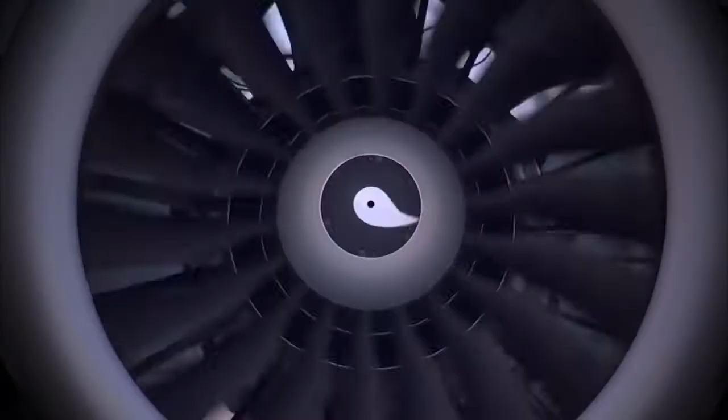The aircraft of today are quieter, more efficient and stronger than anyone could have imagined, even a few short years ago. Of course, future aircraft will continue this trend and become even more efficient and dependable, reaching unimaginable goals that today's aircraft could never reach.

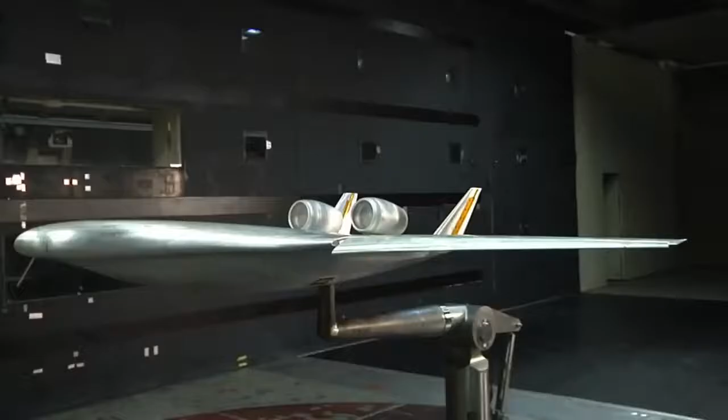But how will they reach these goals, and who is performing the important work to change the way we all fly? The common misconception is that most advances come strictly from major aircraft manufacturers. But the true story is much more complex. Unknown to most of the public is that one of the unsung leaders in aviation is NASA.

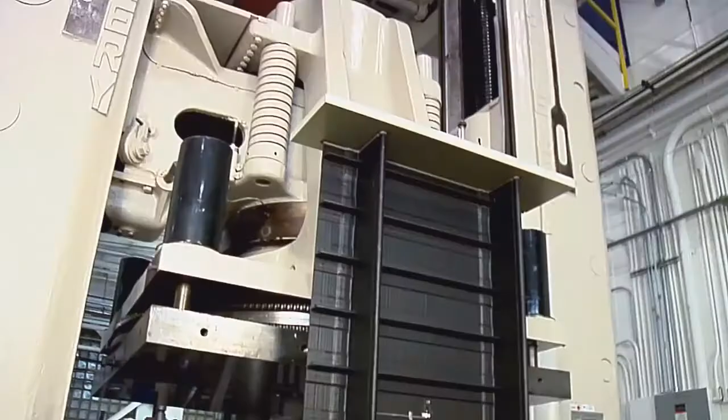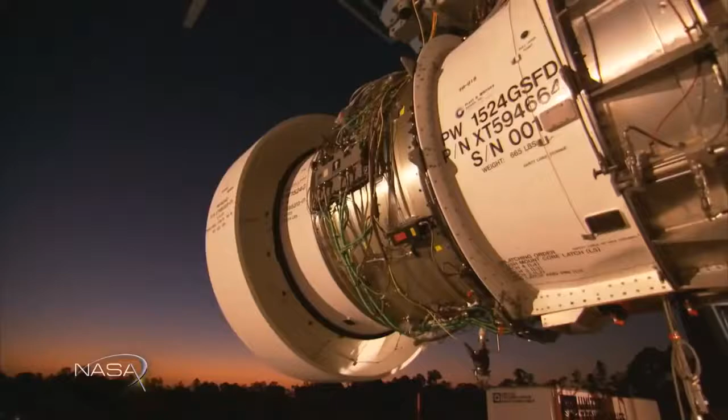NASA engineers work hand in hand with industry planners, developing and testing new designs to make aircraft safer, greener, and much more efficient. On this episode of NASA X, we will look at how this collaboration works, and we'll see how NASA and industry are paving the way for greener, safer aircraft for today and for aircraft of the future as well.

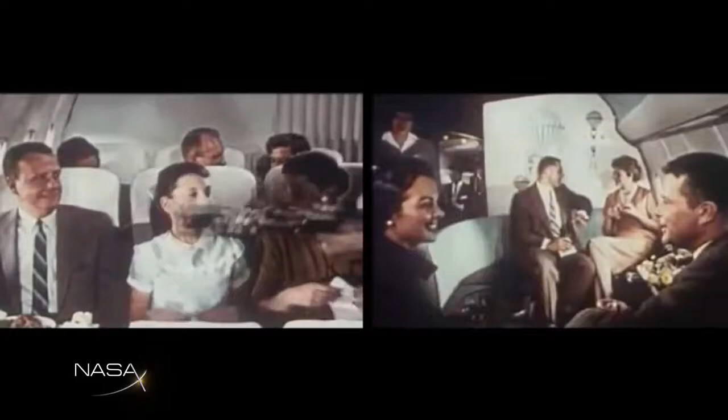This is a familiar sight for modern travellers. Large metal jets roaring down the runway and lifting into the air. In fact, this sight really hasn't changed that much in the last 50 years or so. Other than the way most people dressed for flights back then, the basic concept of air travel is pretty much the same.

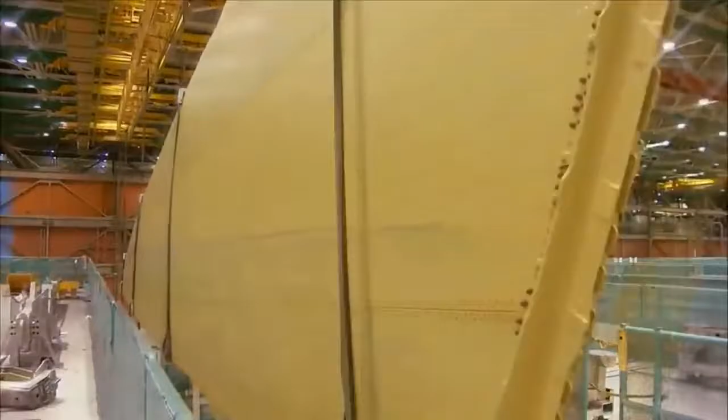There have, of course, been measurable differences in fuel economy, with new developments in engine design and noise reduction techniques. But the basic tube and wing shape and the material used to build these aircraft has remained pretty much the same for years. But that isn't the case anymore.

Like so many products that have evolved dramatically in the last few decades, like phones for example, the same is true for aircraft design. Today more than ever, researchers are pushing the boundaries of the science of flight in their effort to make aircraft of the future more efficient, quieter and greener. So who's taking the lead and why?

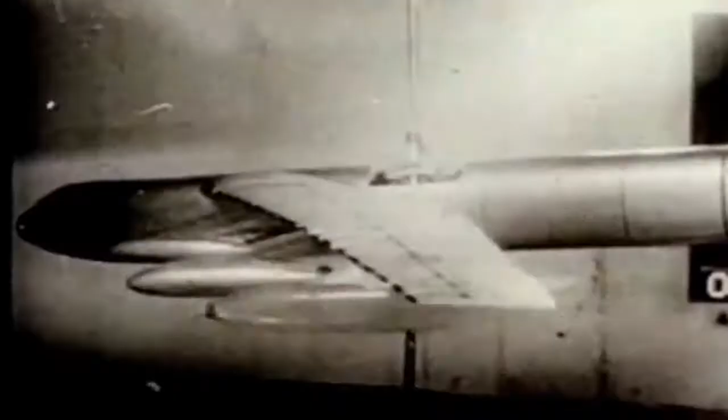Obviously industry is taking the lead in some areas because cleaner operations and more efficiency mean higher profits. But they're just not the only players. One of the leading innovators in aeronautics over the history of flight has been and continues to be NASA.

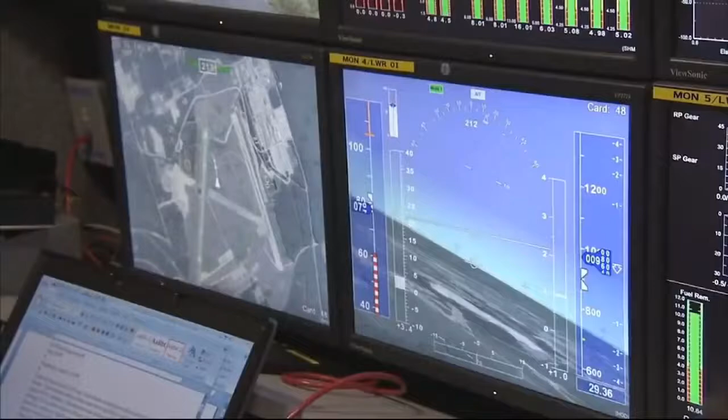The push to modernise and change aircraft of the future is being led by NASA's Environmentally Responsible Aviation Project, or ERA. The ERA project is putting its money where its mouth is with tough but reachable goals to make big changes in how we fly by the year 2025.

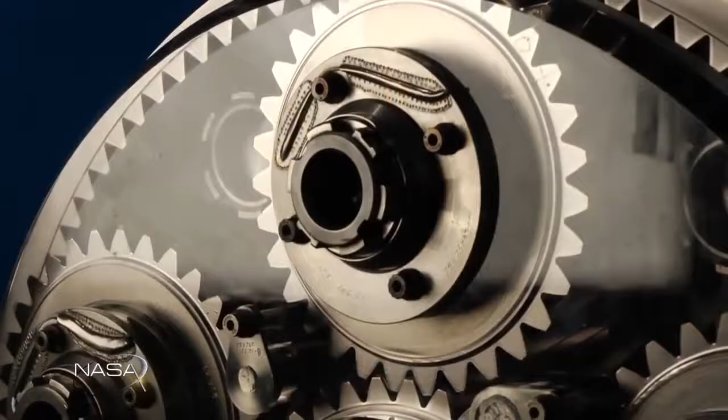So the Environmentally Responsible Aviation Project is a 5-year, 6-year project, and it's focused on advanced aircraft design and the technologies that are needed to enable them. The main goal of the project is to reduce noise, to reduce mission fuel burn, and to reduce LTO NOx emissions. And LTO stands for landing takeoff, oxides of nitrogen emissions.

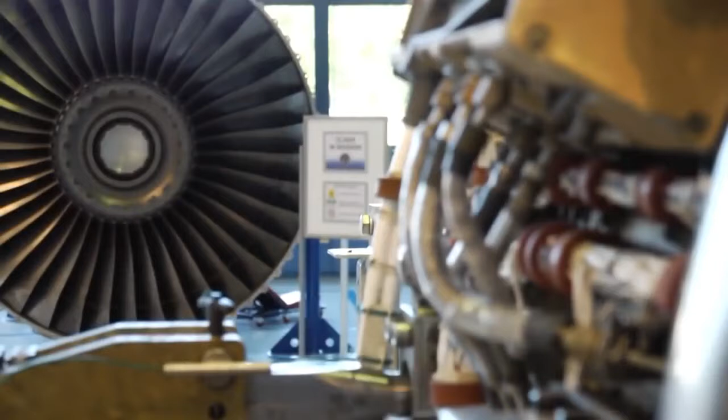And we want to do that simultaneously, and that's never been done before, where we looked at some very difficult metrics and tried to push all of those metrics down simultaneously. And so over this 5 or 6 years, we'll be looking at technologies, we'll be looking at aircraft designs and the combination of those to end up with a configuration that could simultaneously attack these goals.

So how do you make these goals a reality? The 4 basic principles of flight are lift, drag, weight, and thrust. Finding efficiency in each of these basic principles will help reach NASA's stated goals. Let's look at weight first. Obviously, if you can reduce the weight of an aircraft, then you will burn less fuel and therefore become more efficient. Airlines are always looking for ways to carry less weight.

You can see that in extra baggage fees, reduction of heavy items such as ovens and heavy carts on some planes. And in one of the most drastic measures taken in recent years, some airlines have begun asking passengers to use the bathroom in the terminal before getting on the plane, making the passengers a little lighter.

In a 1-month experiment, an airline found that they reduced greenhouse gas by 5 tons simply by asking passengers to use the loo ahead of time. This proves that even small changes in the weight of an aircraft can add up to big long-term benefits. The holy grail, of course, is to make the entire aircraft structure lighter.

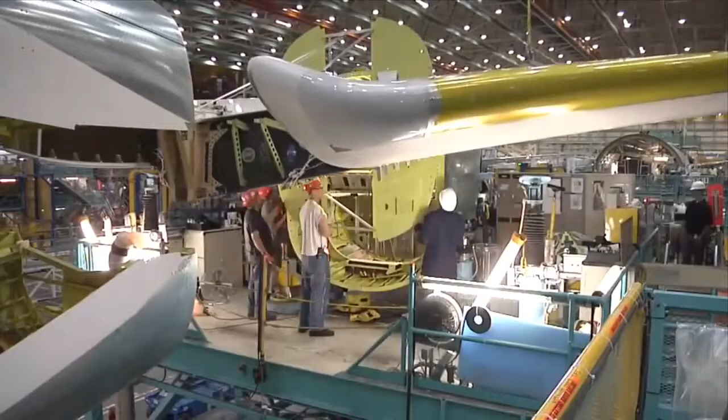So how can this be done? Today's aircraft are made out of metals that are safe, but that are also very heavy. So is there an alternative? In recent decades, NASA and its industry partners have been working hard developing new materials that could bring aircraft out of the 20th century and into the future.

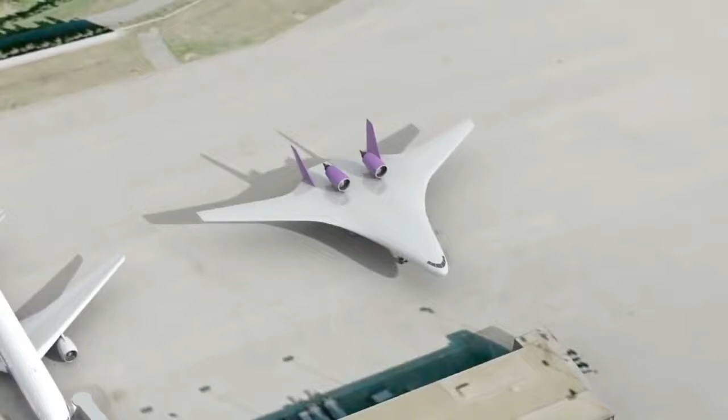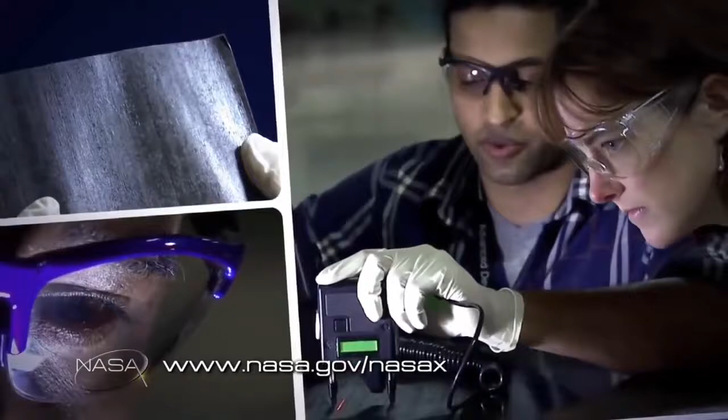New composite materials are leading the charge to replace conventional metals. Aircraft designers are taking advantage of composite materials' lightweight, strength, and flexibility. Aircraft designers have long known about these qualities and have been using something called carbon epoxy composite materials in small quantities for decades.

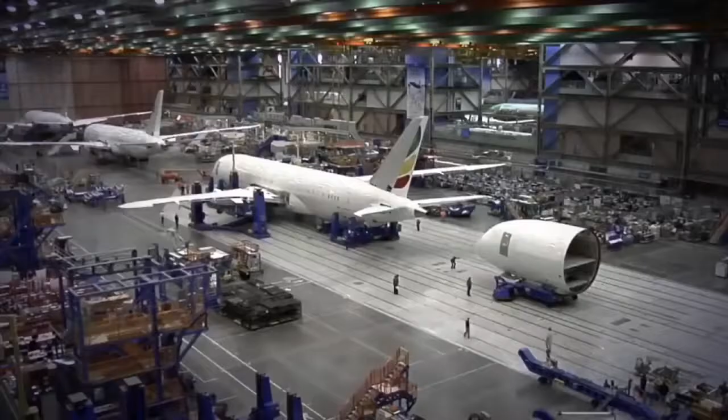After years of research and validation of composites for flight, the Boeing company was the first to step up and build an aircraft almost completely out of composite materials. Called the 787, this next-generation aircraft first came into service in October of 2011. As the first official commercial flight of the 787 took off from Tokyo that year, it was clear that this concept of an all-composite aircraft was here to stay.

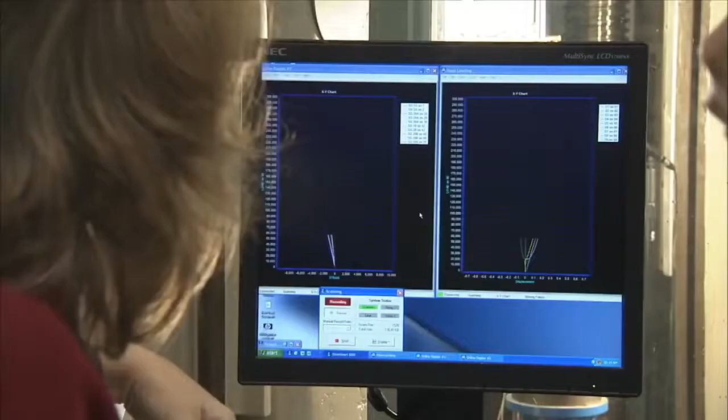NASA is not in the business of building aircraft, but they are in the business of helping lead development programs to move the science of flight along. Once validation and testing in the development process is complete, NASA shares its findings with industry in an attempt to help further research and development.

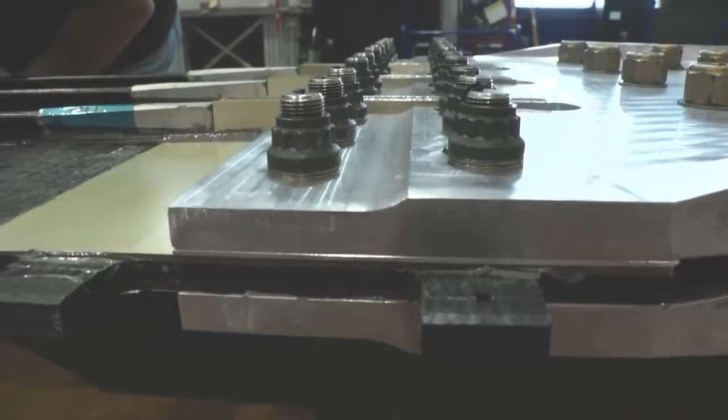One of the programs in which NASA is working with industry is in the development of new composite materials for aircraft. Here, in the Structures and Materials Lab in Building 1148 at NASA Langley Research Center, much of the development of next-generation composites for use in aircraft is taking shape. Called PRSEUS, this new idea has the potential to completely rewrite how composites for use in aircraft are made.

Leading much of the research for NASA's Environmentally Responsible Aviation program in the composite field is NASA Langley's Dawn Jegley. This MIT grad has been working with these materials for decades and has a keen understanding of what needs to be done to make these composites of the future fly.

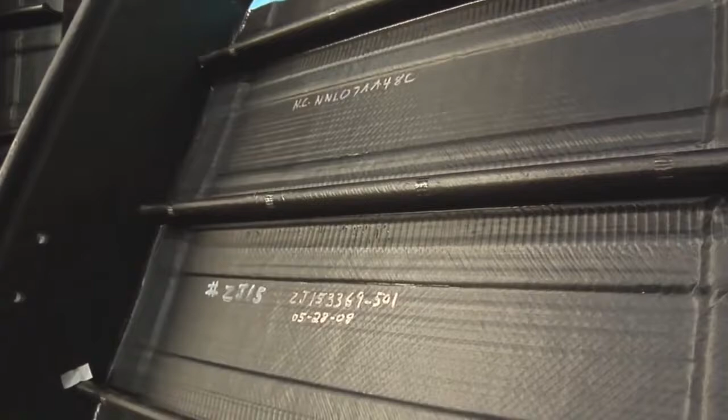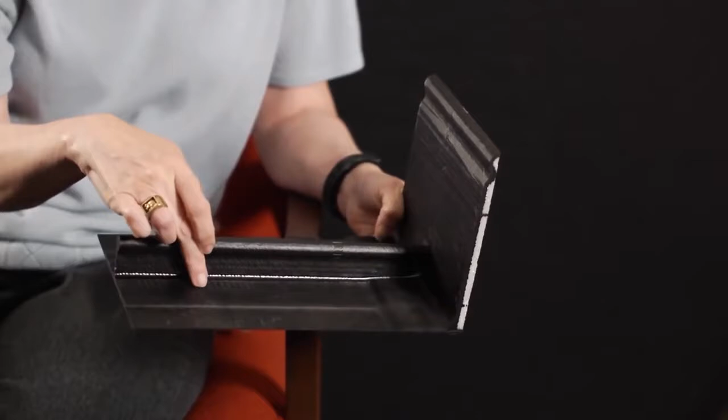PRSEUS stands for Pultruded Rod Stitched Efficient Unitized Structure. And what that means is that we have a graphite epoxy or a carbon epoxy structure, and what we have is pultruded rods inside carbon layers. We have a carbon skin, and we have stitches that run through the thickness that holds the whole thing together.

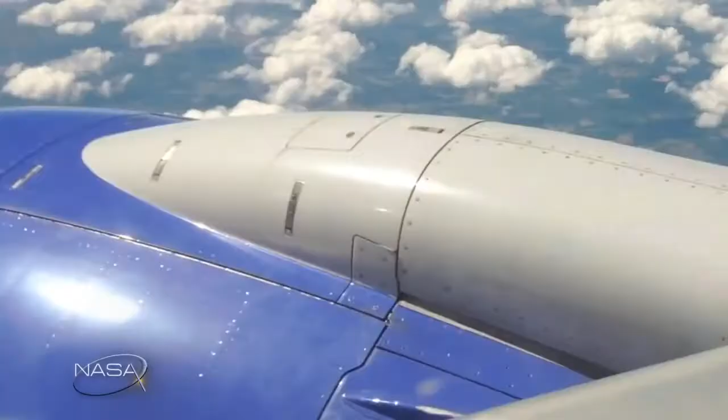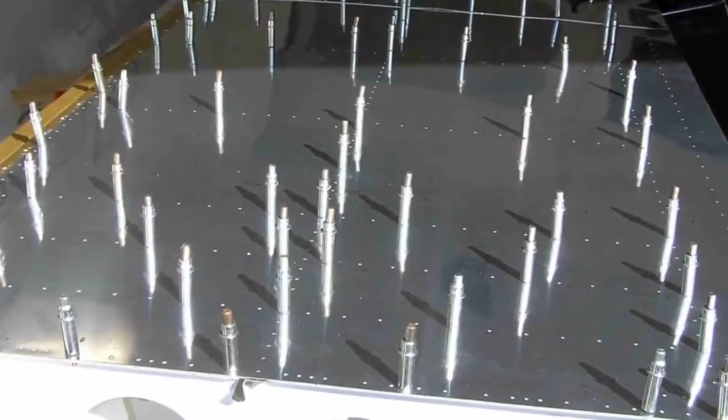One of the huge benefits associated with PRSEUS is its revolutionary stitching technique. On current metal and composite aircraft, one of the key components used to hold the vehicle together are the fasteners, like rivets or bolts. Although these are effective, one major drawback is that quite a few holes have to be drilled into each piece where the fasteners will be added. Not only is that labour intensive, but each hole represents a place where damage or a crack could start.

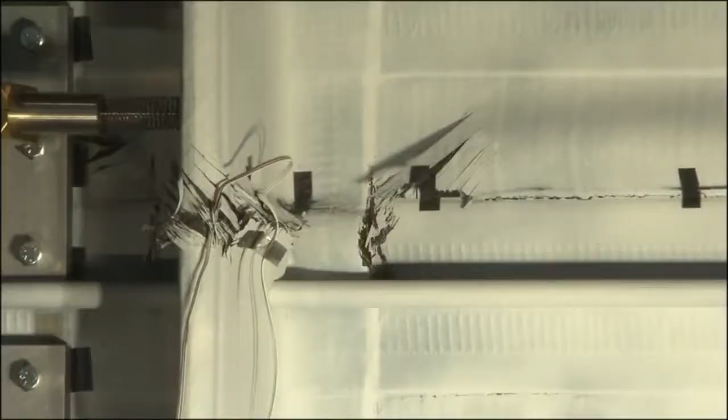But the stitching prevents that from happening. We found that if you have a crack and it grows to a certain point and it gets to some place that it's stitched, that crack will turn. So instead of going through the stitching, it will turn, and that's a good thing because in flight you would rather not have a crack grow all the way around a wing.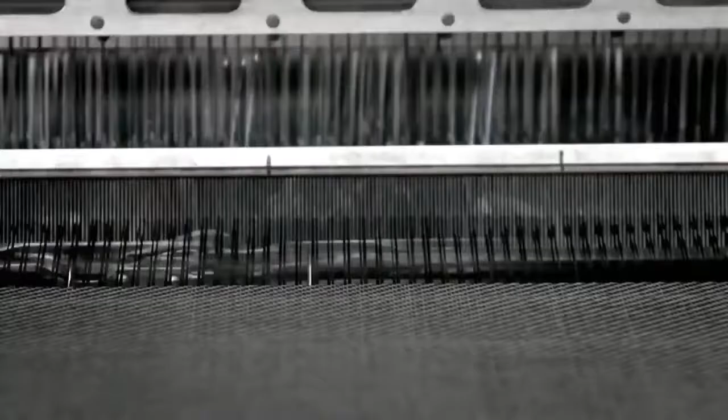When you look at a piece of carbon epoxy composite material, it honestly doesn't look very strong in its raw form. But once it is in its final state, it can be much stronger than metals. We start out with a fabric. It looks kind of like carpeting. And you roll that out into the shape that you're looking for, and you position all the different parts of your structure where you want them, and then you come through with a stitching machine.

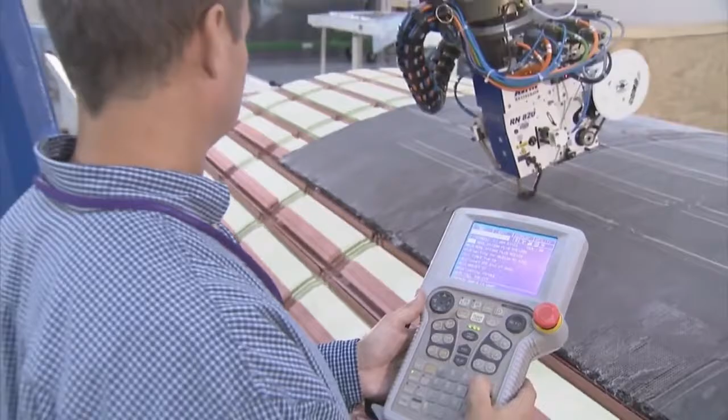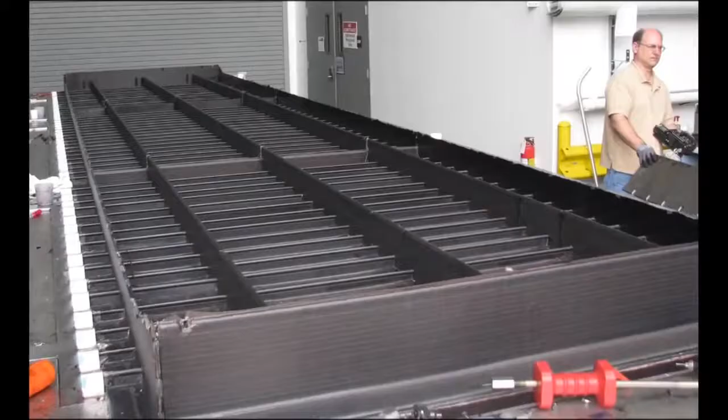After you've stitched the whole thing together, the panel goes into an oven. It's infused with epoxy. We heat it up, and then we get everything just the way we want it, and then we cool the structure. So what happens is you end up with a piece of material, could be a very large piece of material, which is now stiff and strong and just in the right shape that you want it.

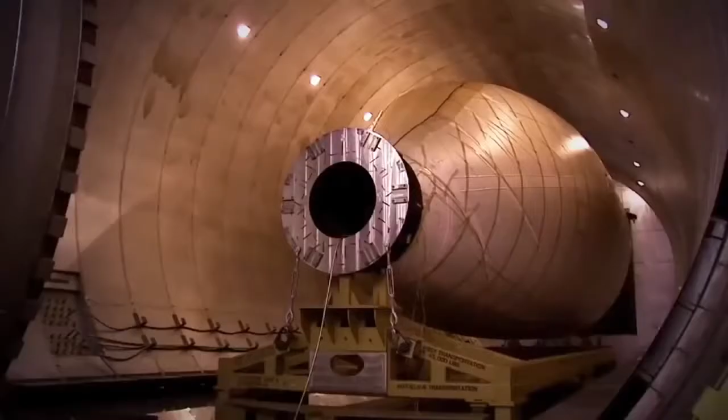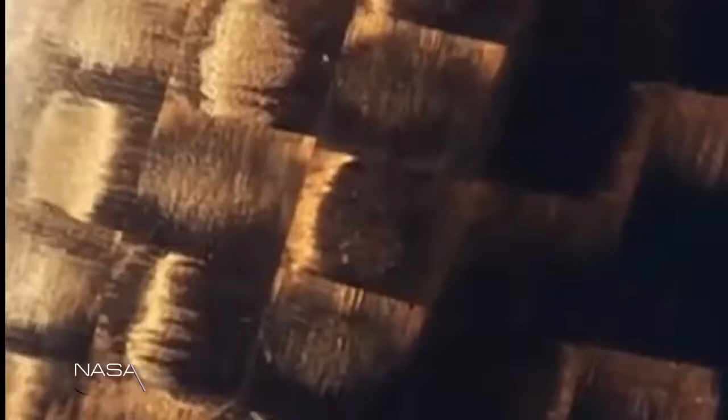Another key component to carbon epoxy composite materials is that they can be tailored to be much stronger than metal. At the molecular level, the properties of metal are isotropic, which means that the properties all run in the same direction. Because of this feature, aircraft designs are very bulky in some areas to provide stiffness, making a craft much heavier. But with composites, you are starting with fibers which are very strong, tough threads, and you can position those threads in any direction you want.

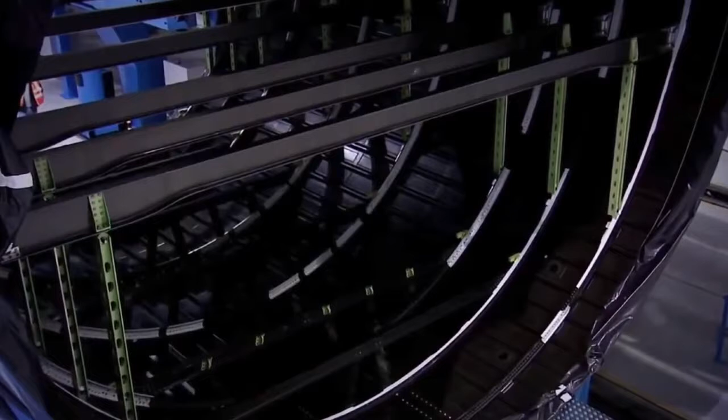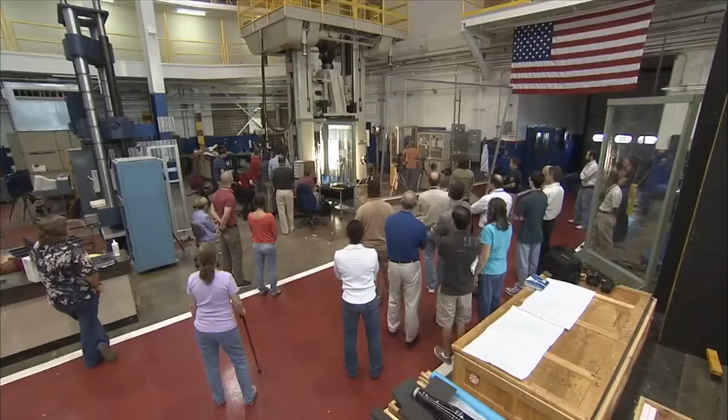For example, if there is an area on the aircraft that takes a lot of load, the designers can place the fibers in that direction, providing enormous strength, but while also using much less material and weight than metal aircraft. Of course, validating that the pieces will work is a major component of the development stage. So I know that NASA really does some great testing of its materials before they go onto any aircraft. How are you testing PRSEUS at the moment?

One of NASA's goals is to develop technology for future aircraft. When we're developing a new structure, one of the things we need to do is fully understand how it's going to behave. And to do that, we start by looking at very small pieces, and then we move up slowly to very large pieces until we get to a full-scale part of an aircraft. And then when we understand that, we go to the next stage, which might be something more like this, where we have what we call a built-up structure.

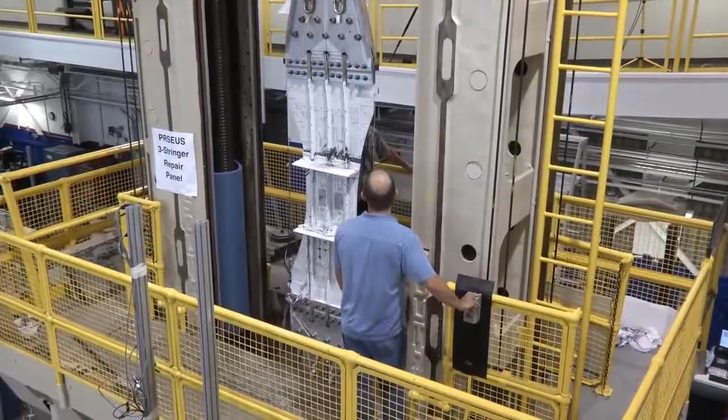So we have a skin, and then we have a stiffener on it. And then we can apply a load. We might push on it, we might pull on it, we might bend it to look at how that behaves. And all the while we're doing this, we're doing analytical studies to make sure we understand and can predict how it's going to behave. Because if we don't predict it properly, then we feel we don't really understand it well enough, and we have to take a step back and figure out what it is we're missing. We have many facilities around the center here that we use for doing those kind of tests.

Well, Dawn, thanks so much for talking to us today about PRSEUS. This looks like an amazing technology, and you're doing a fantastic job. Thank you so much. Thank you.

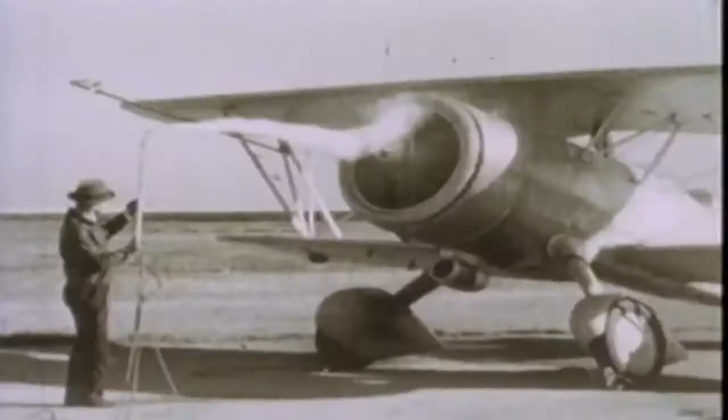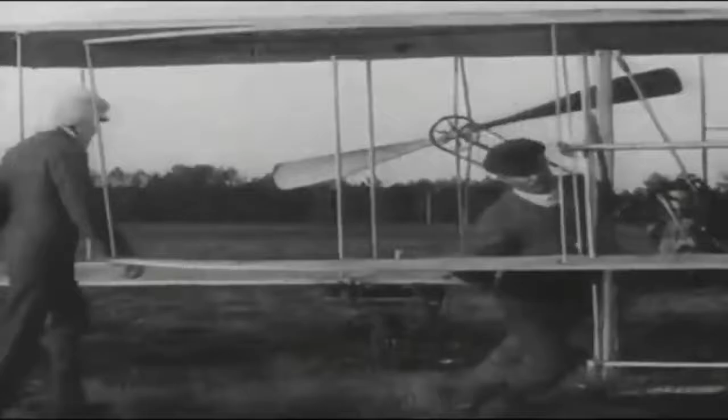Up next, let's look at another of the basic principles of flight: thrust. Since the earliest days of flight, engineers have looked for ways to make the engines we use on aircraft more powerful and efficient. One of the most important early engines was the 1903 Wright brothers design that was used for their very first flight at Kitty Hawk. It only produced about 12 horsepower, but it opened the door for all aircraft engines to come. Since that time, there has been a steady progression in the development of engine technology, from the relatively simple propellers of the past to the incredibly advanced jet propulsors of today.

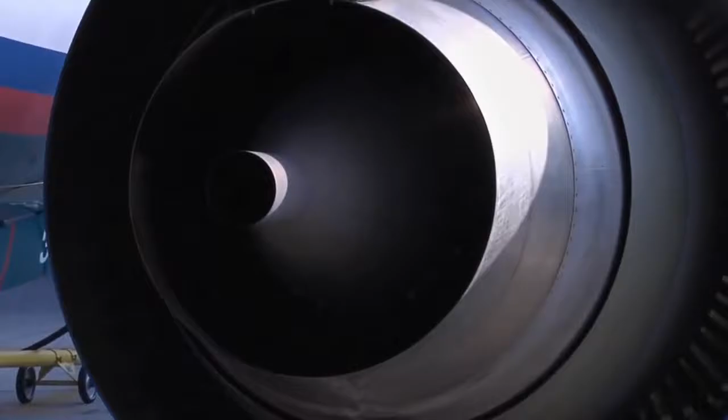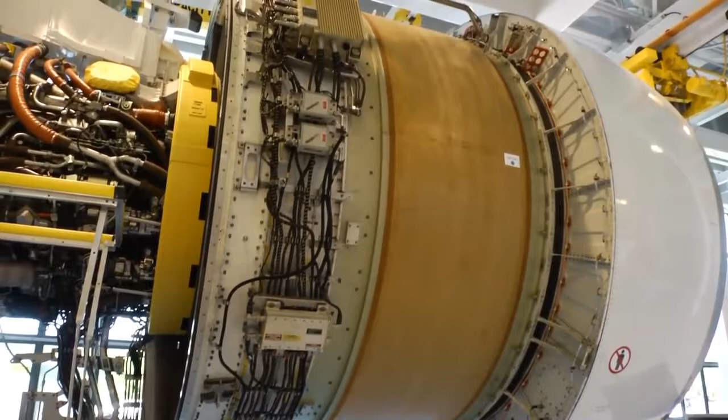Engines have never been better, but although current engines are already very efficient, quiet, and relatively green, they pale in comparison to what the next generation of engine technology will be. To help understand how engine technology is improving, let's first take a look at how a basic turbofan engine works. Incoming air is captured in the engine inlet. Some of the air passes through the fan and into the compressor and burner, where it is mixed with fuel for combustion. The hot exhaust passes through the core and fan turbines and then out of the nozzle.

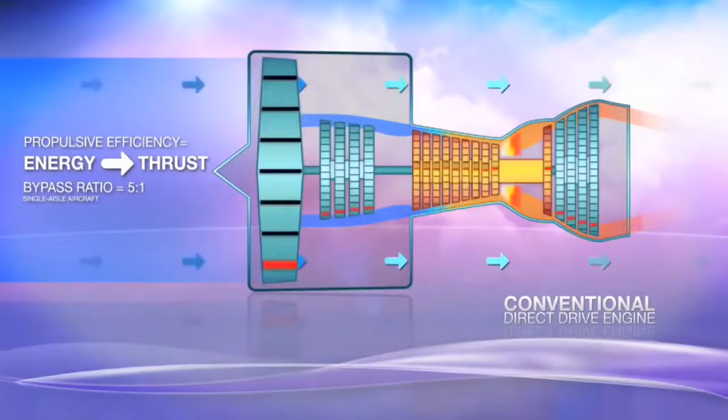The rest of the incoming air passes through the fan and bypasses or goes around the engine. So a turbofan gets some of its thrust from the core and some of its thrust from the fan. The ratio of the air that goes around the engine to the air that goes through the core is called the bypass ratio. Many engines today have a bypass ratio of roughly around 5:1.

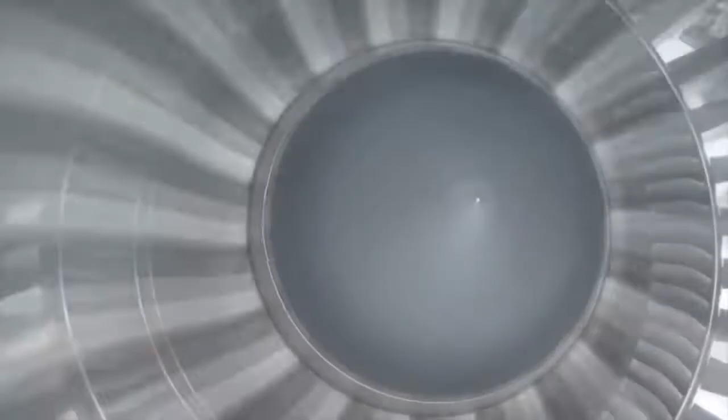Engineers have known for many years that if they could increase the bypass ratio, then the engine would become much more efficient. But the trouble with increasing the bypass means that the size of the engine would have to grow, making it heavier and also unable to fit under the wings of most planes. So, what to do? Over the past 20 years or so, NASA and industry have been working on a solution that would create ultra-high bypass engines while also addressing the stated problems of size and weight.

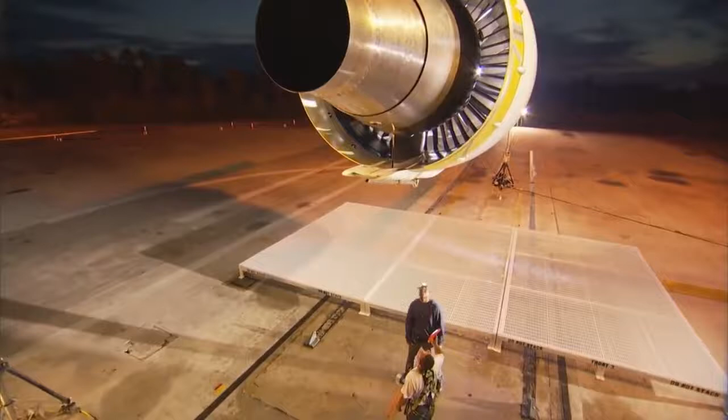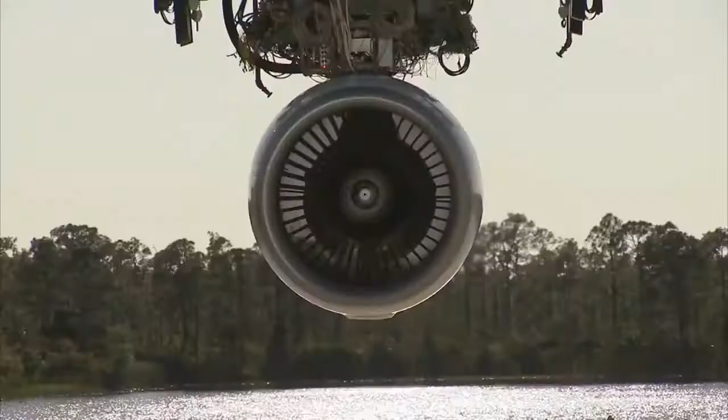Today, a new engine designed in collaboration with Pratt & Whitney and NASA has been developed that will more than double the bypass of current engines. This new engine design has taken many years of research and development just to get to the point where we are today, because three key pieces of technology needed to be created that didn't exist: a new gearing system, an ultra-efficient fan, and a more efficient nacelle.

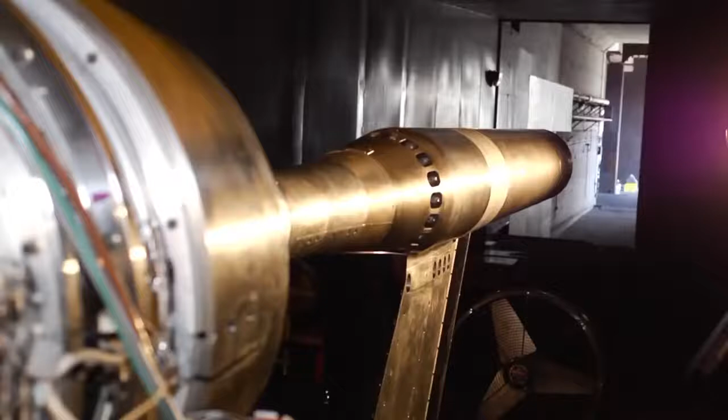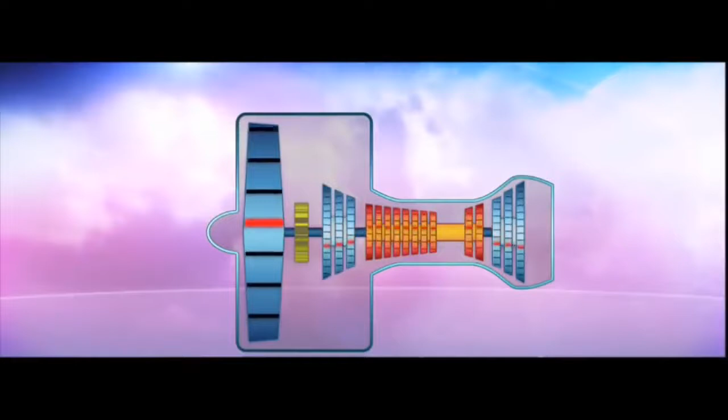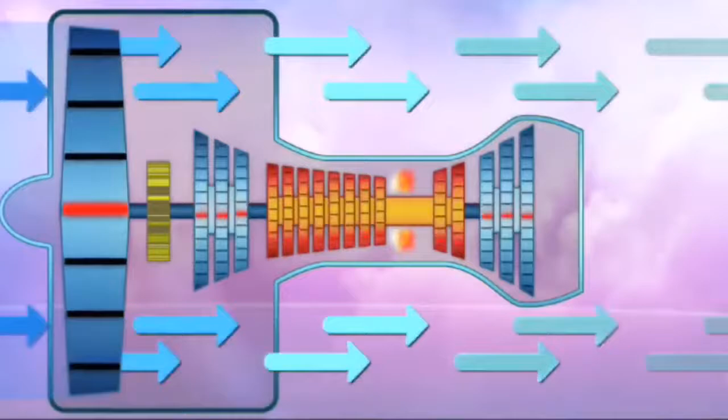Although each of these were difficult to perfect, one of the most challenging was the gearing system for the turbofan. This is because there is a paradox in engine design. The slower the big fan at the front moves, the more efficient it is. But the turbines at the back have to move at a very high rate of speed to work efficiently. Hence the paradox. In order to have the slow-moving fan at the front and the fast-moving fans at the back working together, a revolutionary gear system had to be developed that could allow both of these parts to work together optimally.

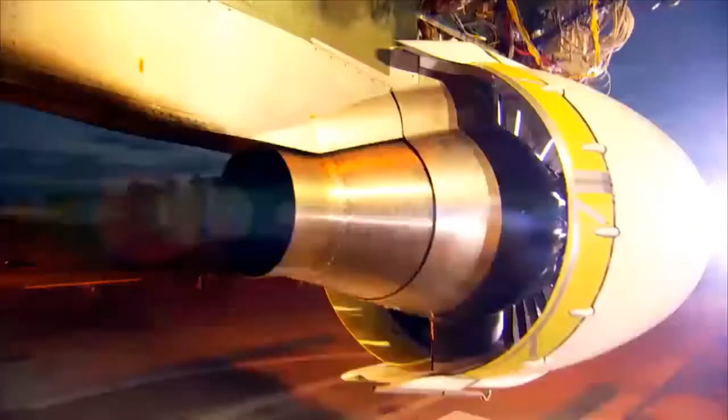So what the gear lets me do is shrink the core engine that makes the power to a large degree. It makes it lighter, takes a couple of thousand parts out, and it means I can replace some very rare super alloys with some more common gear steel. We always knew you could do that, but you need a gear that's way over 99% efficient. We're talking about 25,000, 30,000 horsepower gears.

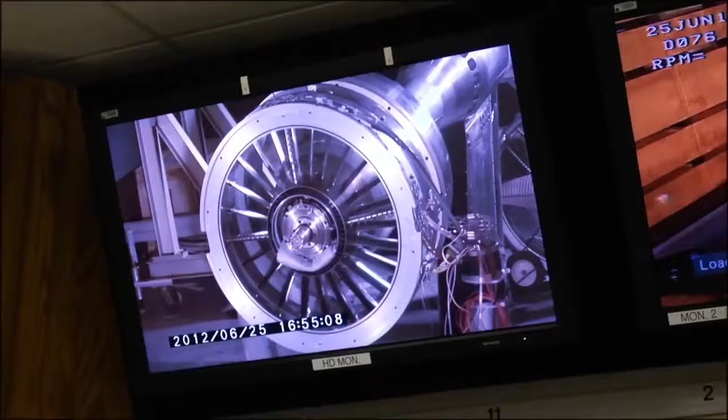A naval ship has that sort of power, and the gear is the size of a small house. We had to develop a gear that's the size of a small automobile wheel, not a house, and it has to last 20 years without maintenance, and it has to be super efficient. And so we've been working on this for at least 20 years. Much of the testing for this engine has in fact come at NASA laboratories. NASA's unique facilities and subject matter experts have helped the Pratt & Whitney team to understand how to configure the ultra-high bypass engine.

So this is an example of the ultra-high bypass engine from Pratt & Whitney called the geared turbofan. This particular engine has a bypass ratio of up to 15:1, which means 15 times the amount of air goes through this part of it than goes through this part. This is the core, or the engine part. This is the bypass part. In this particular engine, most of the thrust is generated in this part, and we've removed the fans so that you can see how small the engine airflow is compared to the overall flow.

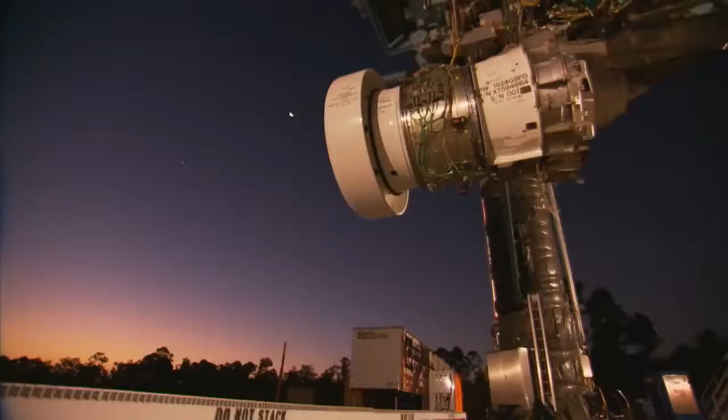So why do we want to do this? Well, this particular design, especially the one Pratt & Whitney is working on called the geared turbofan, has the potential of having as much as 20% better fuel burn than a regular jet engine today. And the reason they can do that is because the more air that you can put up here, the more efficient the engine is and the better the fuel economy. Because fuel costs have spiraled out of control in recent years, the fuel efficiency of this engine could be a game changer for the aircraft industry.

The people who care are not so much Airbus, but their customers, the airlines. So an A320 with these engines on compared to the current engines will make $200 to $400 an hour, on the order of $1.5 million to $2.5 million a year reduced fuel costs, depending upon the cost of fuel, typically. So it's worth millions per year for the airlines. That doesn't mean they still won't charge you for the extra bag, though.

Of course, fuel economy is not the only huge benefit to this engine. Its noise reduction capability is truly astounding. On a typical jet aircraft, the fans at the front are moving at more than the speed of sound, making them very noisy. But because this new engine's forward fans move slower, they now make much, much less noise. They are really quiet. And how quiet is really quiet? For a 737-sized airplane, 150-passenger airplane, the area on the ground that hears objectionable noise is reduced by about 3/4. Almost to the NASA goal, which is to keep it in the airport.